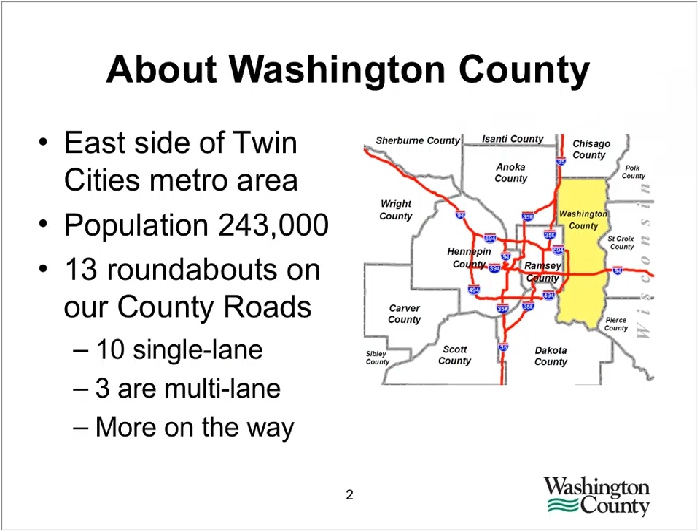Hopefully I can advance the slide here. I'm not sure how many attendees we have from outside Minnesota, but in case we do, just a little bit about Washington County. We're located on the east side of the Twin Cities metro area. Our population is about 250,000, and we currently have 13 roundabouts on our county roads, or at intersections with our county roads. 10 of them are single lane, 3 are multi-lane, and as is usually the case, we do have more on the way. We have 2 planned for this upcoming year.

So what I will cover today is a little bit of history of roundabouts within Washington County, and in particular the multi-lane roundabout, and what did not go so well with those. I'll talk about some treatments that we have implemented as far as signing, striping, delineation, and also a roundabout diet lane reduction. And I will end with future areas of interest and for research. In the midst of this presentation, I will turn over to Professor Hourdos, who can talk a little bit about some of these research initiatives.

So a little bit of history, timeline of roundabouts within Washington County. In 2007, the county opened its first roundabout on our county road system. That roundabout was our full 2x2 multi-lane roundabout. We followed that in 2008, opening 3 single-lane roundabouts, all within the same corridor. In 2010, there were 2 MnDOT roundabouts that opened up to traffic within the county that were at intersections with our county roads. For anyone outside the state of Minnesota, when you see the acronym CSAH, that's County State Aid Highway, essentially a county road that receives state gas tax money. In 2013, we opened 6 more roundabouts along our county roads, 3 of which were owned by the Minnesota Department of Transportation, 3 of which were owned by the county, but all involved county road intersections.

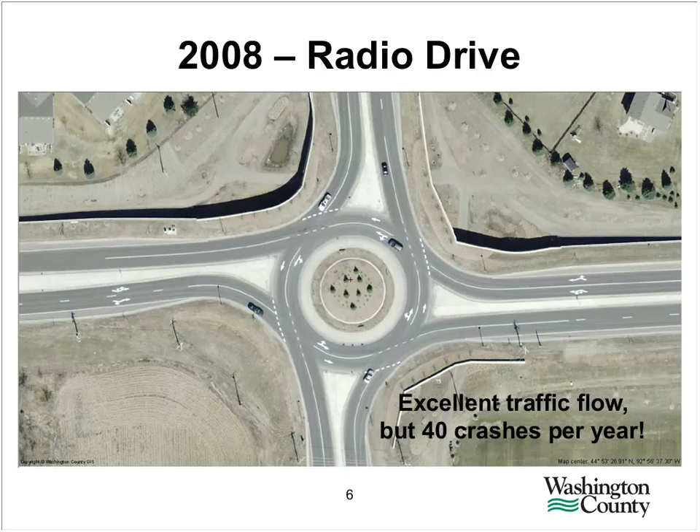And it did solve the traffic flow problems. Definitely the queuing went away, the delays went away, but it was averaging 40 crashes per year, which was very alarming. By and large, they were certainly all very minor crashes, low speed, low impact, but certainly from a public relations perspective, as far as wanting to implement more roundabouts to help promote traffic safety, this was really a problem and something that we had to address.

As time went on, we realized that really this was not our boogeyman. We had a much larger issue to contend with as far as driver perception. But this was certainly something that jumped out in conversations early on.

So what it quickly distilled down to was there's really two basic flavors of intersections that feature circular center islands. The first one, which we had constructed on our county road, is a modern roundabout. For the purpose of this presentation, I will say that a modern roundabout is an intersection at which left turns are made by the far side of a central island. As opposed to a standard intersection that does not have that central island, where those left turns would pass on the near side of each other rather than on the far side.

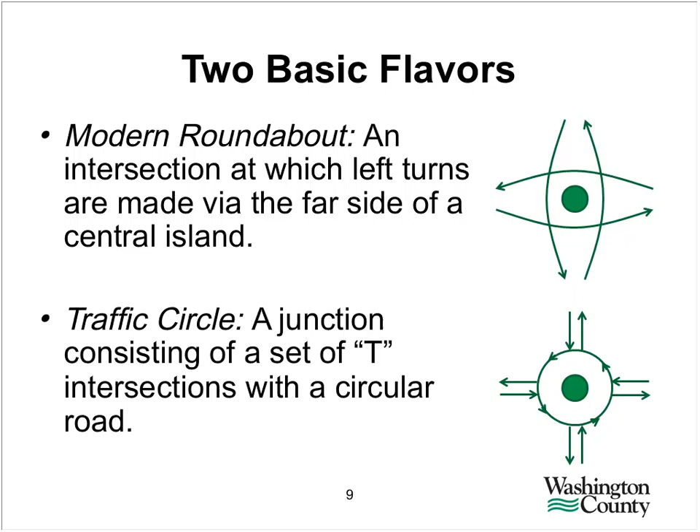I'll highlight some of the differences here and why that's important. It's important because, especially when you start to get multiple lanes involved, the legal operations and the proper driver behavior that we expect are very different at these two. At single lane configurations, that can kind of be safely ignored, but in multi-lane conditions, this is certainly a problem.

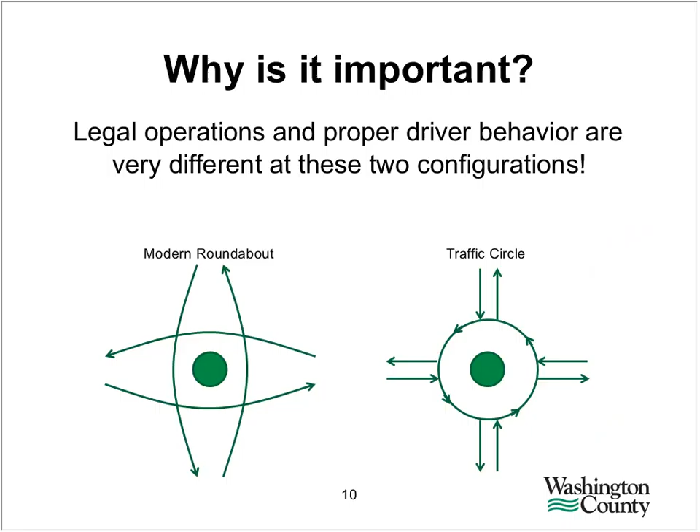To give an example of that, our most common crash type: you can see our modern roundabout on the left and that circle road up at the shopping center on the right. Both have 2 lanes of approach, both have yield control, and even though one's much larger, conceptually they look pretty similar to drivers. You can see in the picture on the right at the traffic circle, the driver entering via the right-hand lane really has no problem entering alongside cross traffic that's on the inner lane of that traffic circle. But when you look at the picture on the left, you can see if that driver does the same thing at a modern roundabout, there will be a collision. That's definitely the most common crash type that we were seeing.

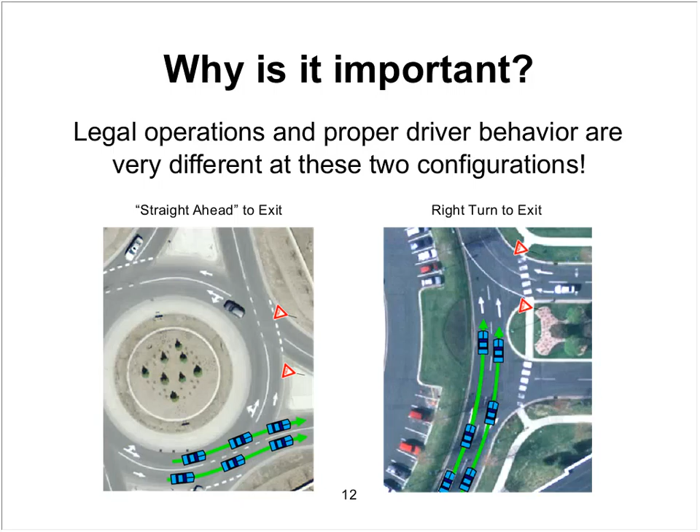A less common crash type, but still a significant one, is the fact that at a roundabout, the lanes lead out of the intersection. Whereas at a traffic circle, since it's a series of T intersections, drivers need to make a right turn to exit. In these two pictures, I'm not showing the crash type, but you can see on the right, it's just fine and dandy for somebody to continue to circulate around the intersection in that outside lane. If somebody had done that at the roundabout, they would have collided with the vehicle immediately to their left. Likewise, at the traffic circle on the right-hand side, that inside lane has difficulty exiting - they essentially get trapped by the traffic that's in that outer lane. That's something that would never happen at a roundabout.

To take circular type intersections out of the equation, we at first thought the shopping center traffic circle was our boogeyman, but really it was much larger than that. It really came down to what drivers encounter at any multi-lane intersection.

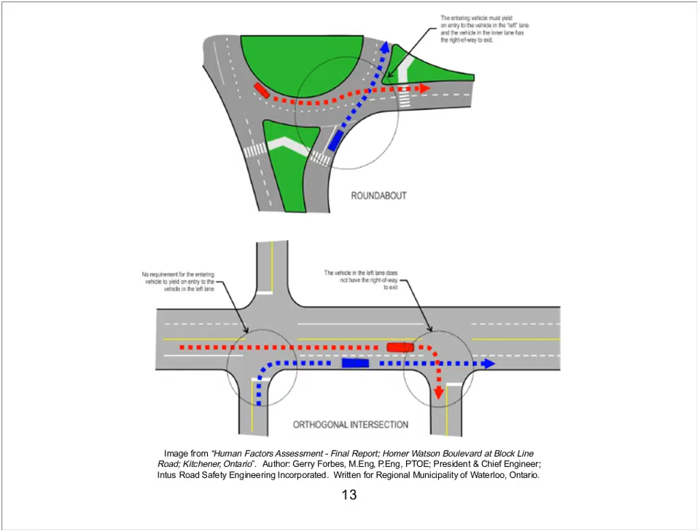But the problem is drivers are trying to apply that same logic to a roundabout. At the bottom, the driver in blue is making a right turn. At the top, the driver is making a crossing movement. What the problem boiled down to was drivers were perceiving that roundabout entry as a right turn when actually it was a crossing movement. That's when we realized that was the root of our issue. How do we communicate that effectively to drivers?

So what does this all boil down to? A modern roundabout is not a series of T intersections. There is no circle road or circulatory lane at a modern roundabout because the lanes lead out of the intersection.

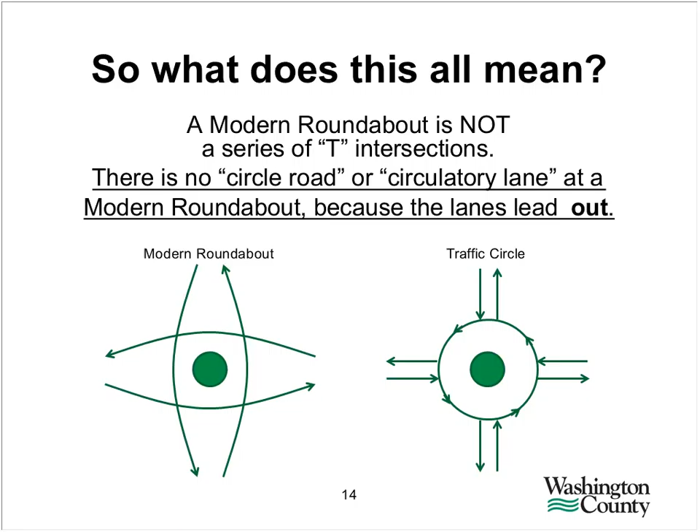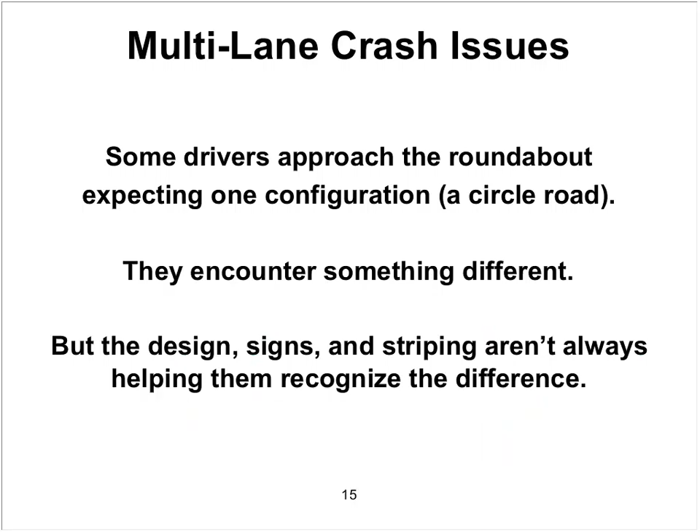The crash issues we were seeing were because drivers would come up to the roundabout expecting a certain type of configuration, that being a circle road. What they were encountering was something different, but the design of the roundabout, the signing and the striping weren't enough to help them recognize the difference between those two configurations. That was the root cause of all the crash issues we were seeing. It became very apparent by reviewing all the crash information and the statements by drivers in those crash reports.

Our less common crash type, but still significant, is what we termed the fail to exit crash. This is when a driver attempts to circulate in that outer lane, but what they're really doing is making a left turn from a right-hand lane where that is not allowed. If this were a series of T intersections, that would be absolutely acceptable, and that's certainly the case at the shopping center, but it was never the case at the roundabout, and we certainly saw some crashes resulting from that.

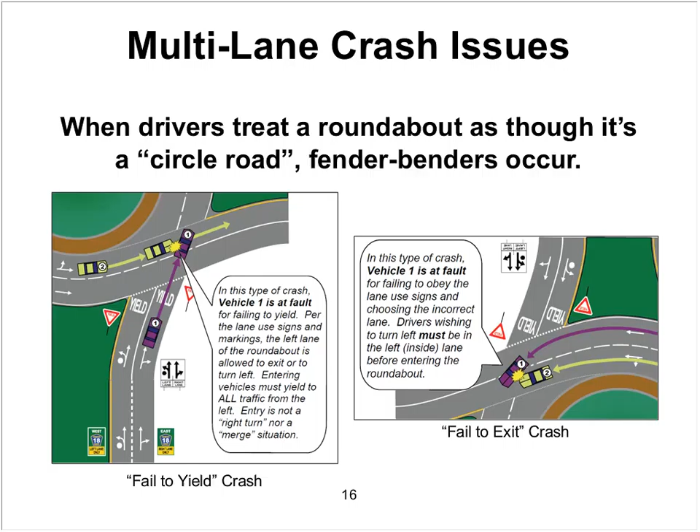The crash issues we were seeing were pretty significant in number. We were tracking them quarterly, and it varied a little bit, but generally about 9 to 12 crashes per quarter.

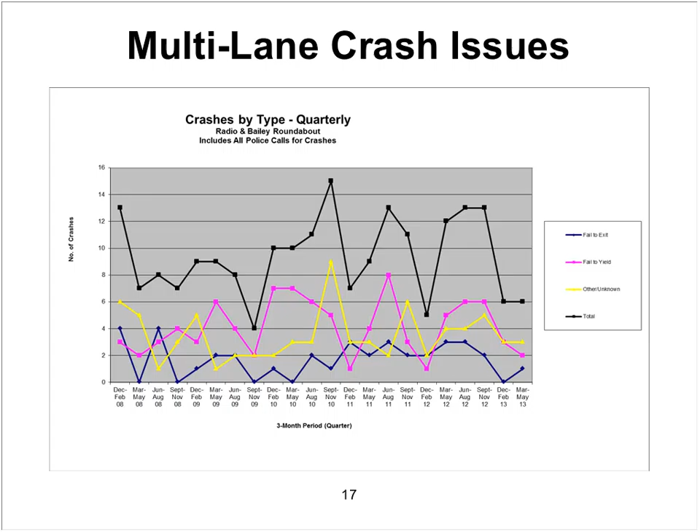So we certainly realized we had a problem here. There was a roundabout that opened in Richfield experiencing very similar issues, with an identical geometric configuration to ours. This was a research project we took great interest in, and it certainly posed some challenges as far as data collection. With that, I will turn it over to Professor Hourdos, who can talk about those data collection efforts.

As Joe said, another roundabout in the metro area of the Twin Cities was the one on Portland and 66th Street in Richfield, Minnesota, a suburb attached to Minneapolis. Joe did a very good job describing the crashes, and these types of crashes were observed in the Richfield roundabout.

After 2008, it was converted from a signalized intersection that was the third worst in Hennepin County in terms of crash severity and cost. In the first 3 years of operation of the 2x2 roundabout, there were 90 reported crashes, all minor, property damage only, but still a big concern. The traffic demand does not allow any lane reductions, so other solutions had to be investigated since the combined AADT was 30,000 vehicles.

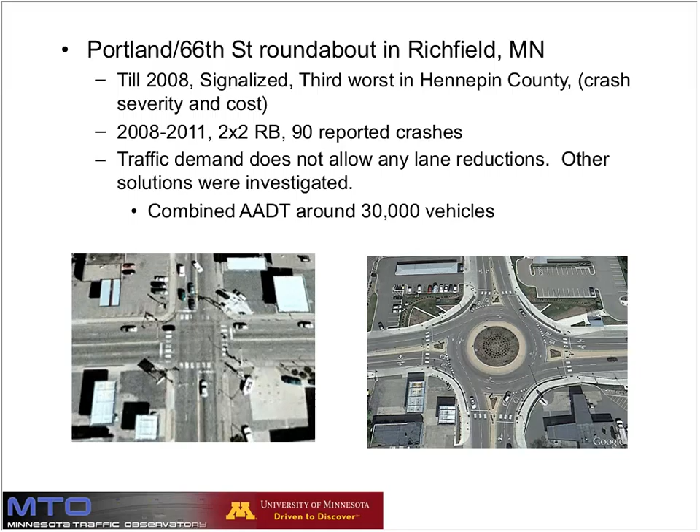If you look at some of the videos we collected during our research, you'll see the exact types of crashes Joe showed. On the right-hand side, you'll see a vehicle from the outside lane trying to make a left turn, colliding with a van exiting the roundabout. In another video, you'll see a failure to yield, where the vehicle thought the vehicle inside would keep going around, but instead it wanted to exit.

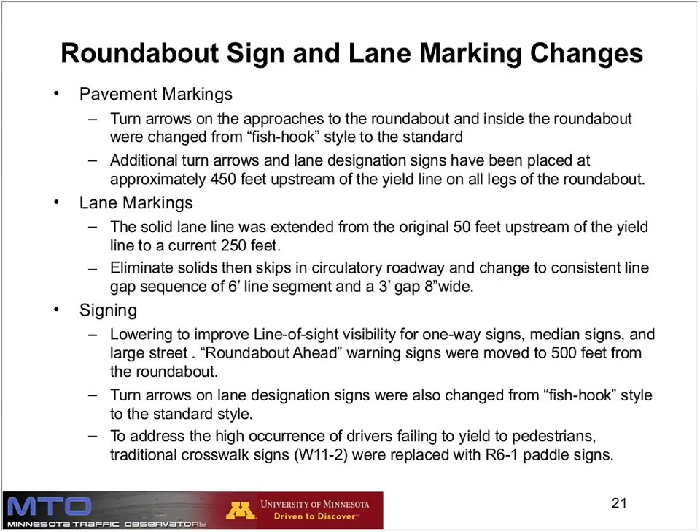The next slide shows a rather long list of things we decided to change in the roundabout in an attempt to fix the problem. I'll go to the next slide instead of reading all this, which is more revealing of the things that changed.

In terms of pavement markings, the turn arrows on the approaches and inside the roundabout were changed from the fish hook style to the standard style, because some people believe drivers are unfamiliar with the fish hook sign. It gives a sense of circulating, so regular straight arrow signs would be better.

Additional turn arrows and lane designation signs were placed approximately 450 feet upstream of the approach. The solid lane line, which originally extended about 50 feet upstream of the yield line, was extended in the new design to 250 feet upstream, to reinforce the message that drivers need to select the appropriate lane before reaching the roundabout entrance.

In terms of lane markings, we also eliminated the solid-then-skip pattern in the circulatory roadway and changed it to a consistent line-gap sequence of 6-foot line segments with a 3-foot gap.

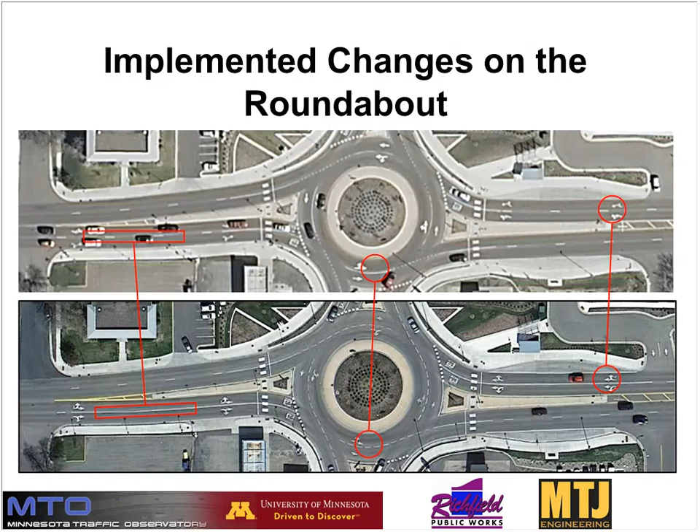In terms of signing, the yield signs at the entrance and the pedestrian crossing signs were all lowered so the line of sight is not obstructed as vehicles wait at the yield line. Additionally, since a previous study showed a very low yield rate to pedestrians on this roundabout, the crosswalk signs were replaced with R6-1 paddle signs on the islands before the crossings.

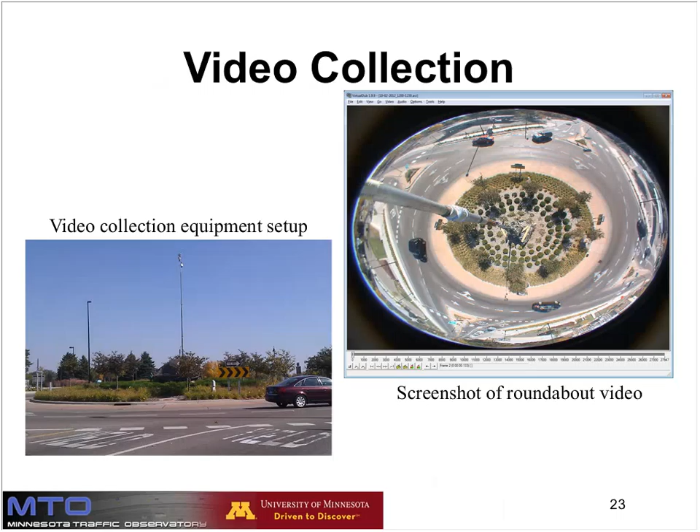The types of data we extracted manually for this project included, for every vehicle using the roundabout: the time of entry, the vehicle type, the entrance lane, and the type of violation performed. There's a list of 13 possible violations vehicles can perform in a roundabout, like the ones Joe described, in addition to changing lanes mid-roundabout and straddling lanes. We also recorded the correctness of the entrance lane choice, depending on where the vehicle finally wanted to end up.

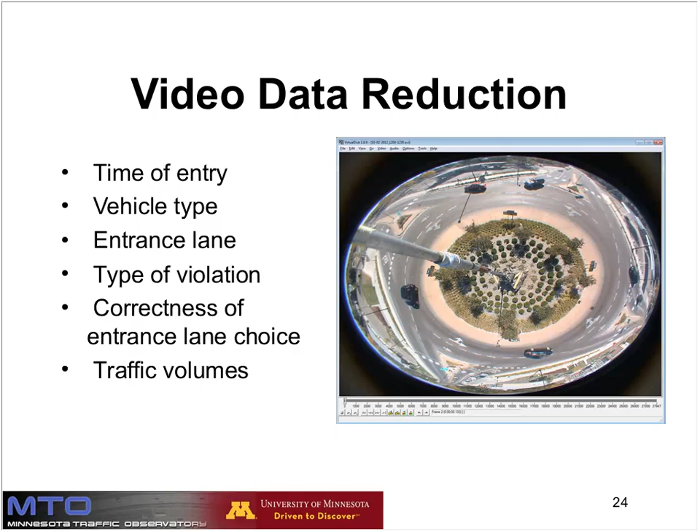Our before and after study happened in two stages. We collected video before any of the changes took place, and we collected video again approximately 3 months later. Then we repeated the data collection 1 year after that, because we wanted to see if the changes had...

Specifically in terms of the yield violations, although in the immediate before-after condition we saw a slight reduction, unfortunately this was not sustained over the year after, and in that case we actually noticed a 30% increase in yield violations.

Now, in terms of lane changes, which only generate a few crashes and very minor ones but still are violations, immediately we saw a 20% decrease in these violations, and that decrease was sustained a year after.

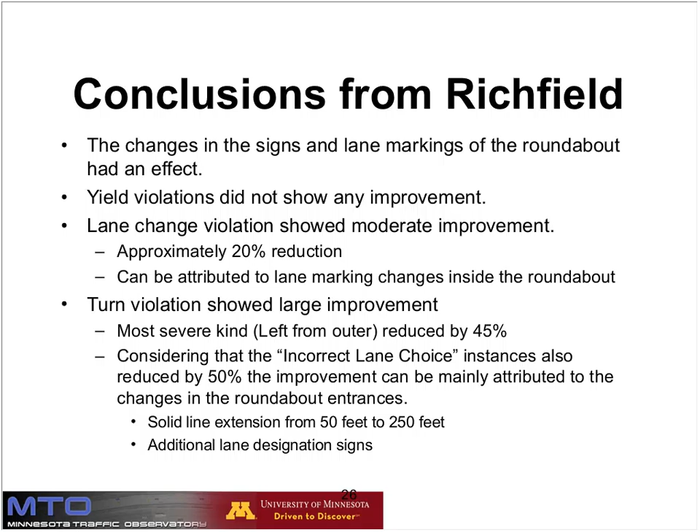So following that project, since that was only one roundabout, we had to extend our investigation to more roundabouts with different designs and different types of driving population, in order to solidify our ideas about what can be done to multi-lane roundabouts to improve safety.

For the current project, which is currently ongoing, we planned to select a minimum of 3 additional roundabouts but ended up with 4. One is on the University Drive and 5th Avenue South intersection in St. Cloud, Minnesota. Two are on Highway 22 in Mankato, crossing Adams Street and Madison Avenue. And a brand new one, which opened last summer in Lakeville at the intersection of 185th Street and Kenwood Trail.

These roundabouts vary greatly in terms of the built environment, the driving population, and especially the age of the roundabout. The goal of our project is to solidify our understanding of what solutions in terms of lane markings and signs work, so we can provide guidance for Minnesota county and municipal engineers.

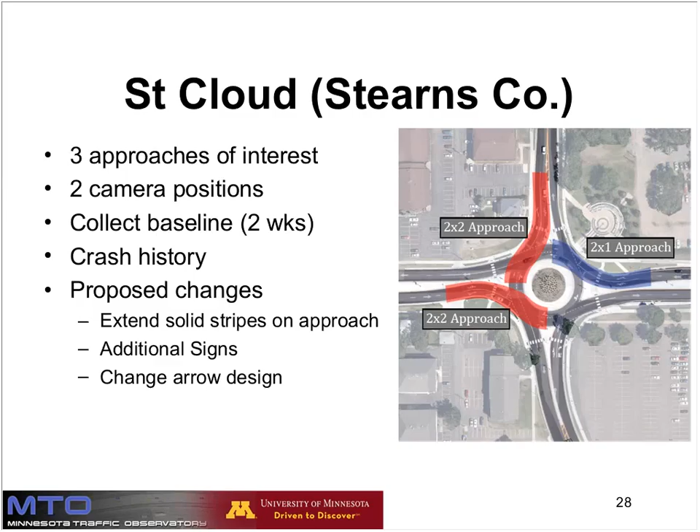Now, in the St. Cloud intersection roundabout, there are 3 approaches of interest, and only 2 are 2x2 approaches. So we deployed 2 cameras and collected for 2 weeks, in addition to looking at the crash history. Now we're proposing implementing an extension of the solid stripes on the approaches and putting additional signs. We're working with St. Cloud to see if this is going to happen as part of this project.

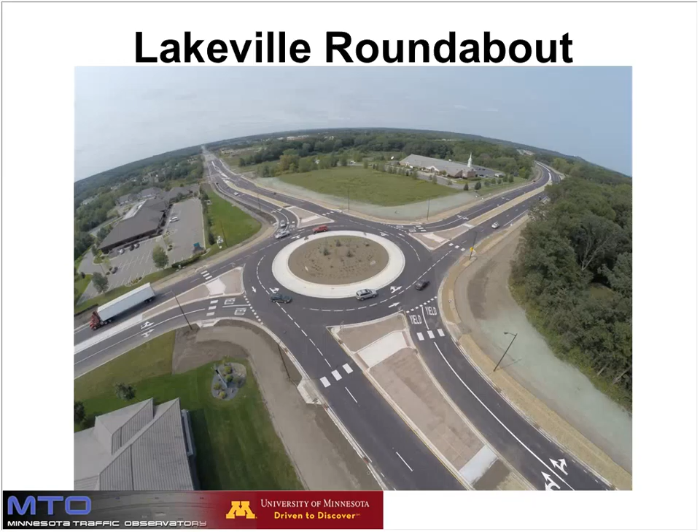Now, the latest roundabout is the one in Lakeville, and you see here a bird's eye view of it. It is brand new, and immediately after it opened there was panic because of all the crashes that were taking place. There were 7 crashes in the first week of the roundabout opening.

So one difference is that this roundabout in Lakeville implemented some of the guidance we provided from Richfield. They used straight arrows instead of fishhook arrows, as you can see here. They also extended the solid line to 100 feet from the yield line instead of 250 feet. In addition, unlike the roundabouts in Washington County and Richfield, this one also has overhead lane designation signs.

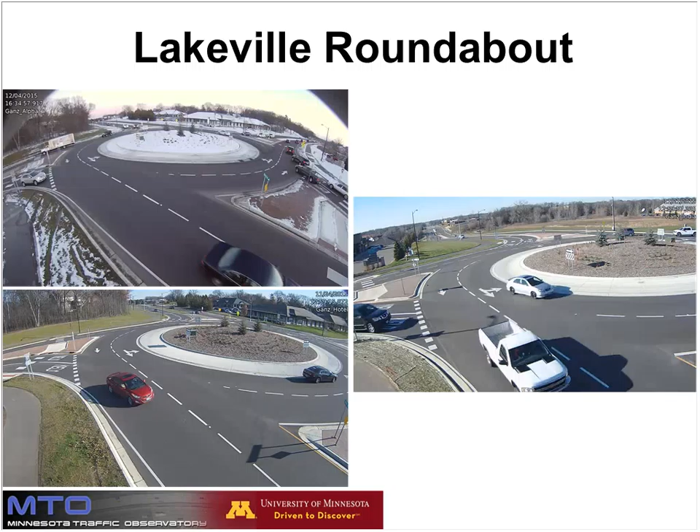These are some screenshots of the video views we collected. Because we couldn't collect data the circular way again, and because we're developing an automated method of extracting violations, we're collecting video from multiple regular cameras around the roundabout.

The two roundabouts in Mankato are both on Highway 22. The first is the intersection with Adams Street as you go from north to south, and the bigger one is the intersection with Madison Avenue. The Madison Avenue one is a complete 2x2 with channelized right turns, which is a new element compared to the previous ones. The Adams roundabout has two 2x2 approaches and a sort of turbo roundabout additional lane opening on the south side.

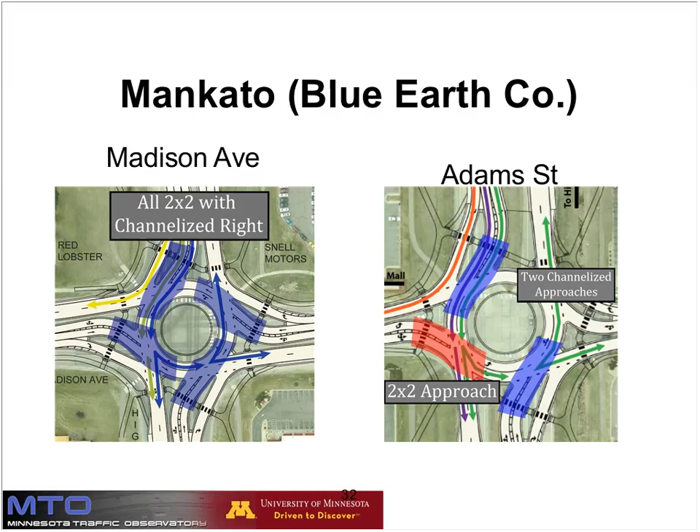The Mankato roundabouts also implemented very clear overhead signs, and if you proceed further down, there are more signs actually mentioning the street names where each lane will take you.

We had very good collaboration with District 7 of MnDOT, who were very engaged with the project and provided us with amazing help. They brought power to the poles and had their own crews helping us put up our cameras. We managed to collect data from the first day the roundabout was opened and for several months after. Changes in the signs and lane markings took place a year after opening because of observed mainly yield-related crashes, and we collected data after these changes, which mostly involved the size and location of the yield signs.

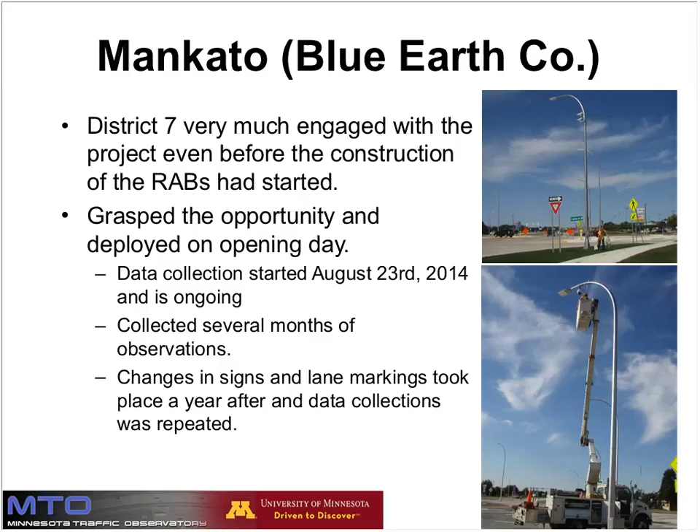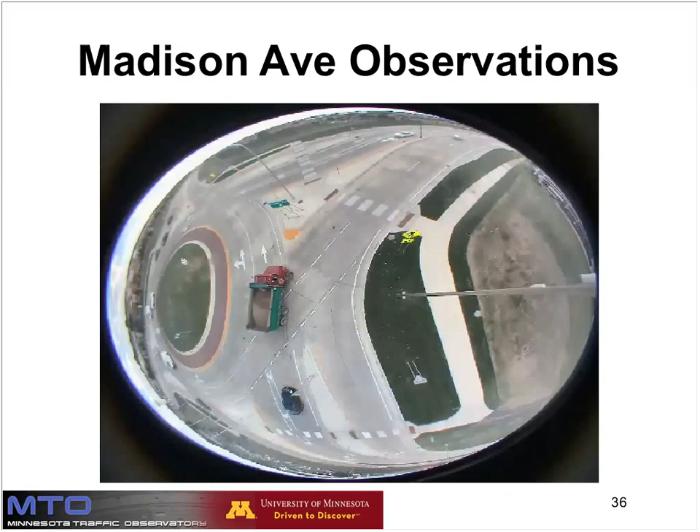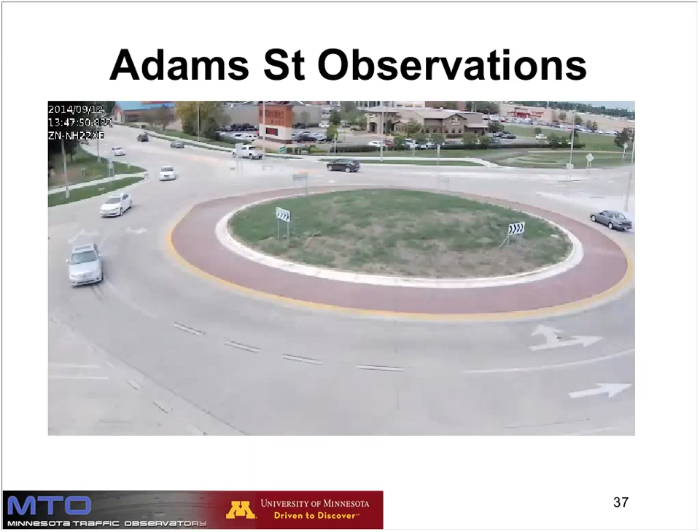These are observations from the Adams roundabout, and basically two things are happening there. One is yield violations, mainly in the north-south direction, like this one where a very big semi-trailer—I cannot imagine what this trailer was thinking trying to find room to squeeze itself into the roundabout. It's very peculiar, but this is a typical type of crash happening at those two roundabouts.

If you go to the next slide, one additional conflict that has generated a few crashes but is definitely a problem is that this roundabout has a semi-turbo design where an additional lane opens on the south only for left movement. A lot of vehicles, mainly coming from Highway 22 southbound, confuse this lane and go straight, conflicting with vehicles exiting on Adams. The exit on Adams is a single lane, so two vehicles cannot fit side by side, creating a potential problem for side swipes. You can see these vehicles performing the violation.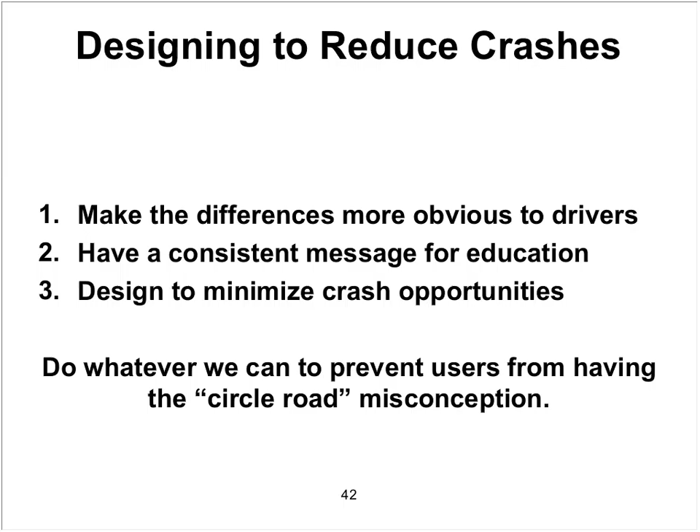So we want to do everything we can from both the signing and striping, the education, and the geometric design to do whatever we can to prevent that circle road misconception, that right turn misconception.

And so as far as making the differences more obvious to drivers, we've deployed a number of tools at some of the roundabouts that we've been building.

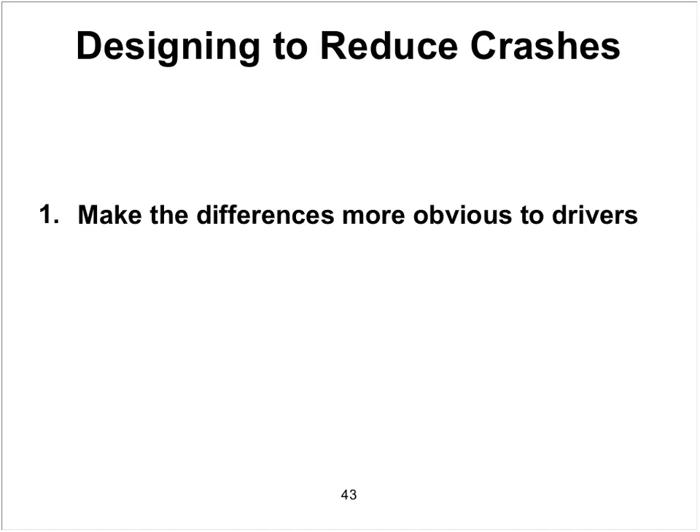In large part from the outcome from Richfield, and certainly from our own experience as well, we did eliminate usage of the fishhook signs at all of our roundabouts on county roads within the county. We did originally have some of these out at Radio and Bailey, and the reason these fell out of favor is because the shape of that arrow does imply, or certainly leaves room for confusion, to suggest that entering the roundabout is a right turn.

Followed by some circulation, followed by another right turn to exit, which is really not what it ever was. You can see in the picture here that our exits are designed very much as a straight through movement. So we eliminated the fishhook signs, both on the signs and the pavement markings, and switched to the standard arrow. This was in large part informed by the research in Richfield.

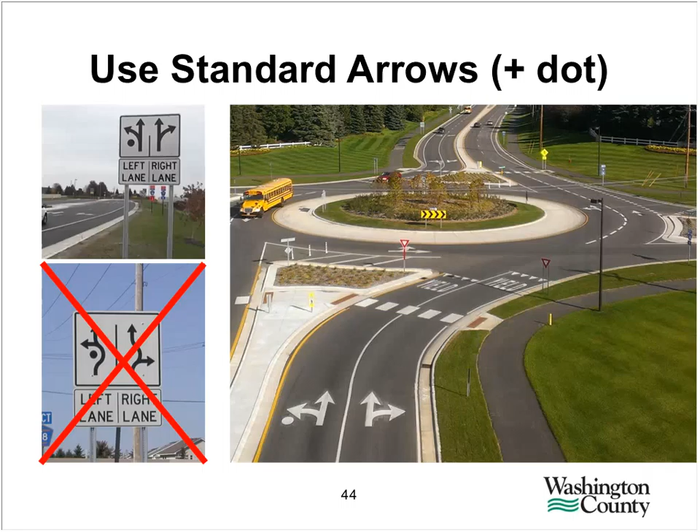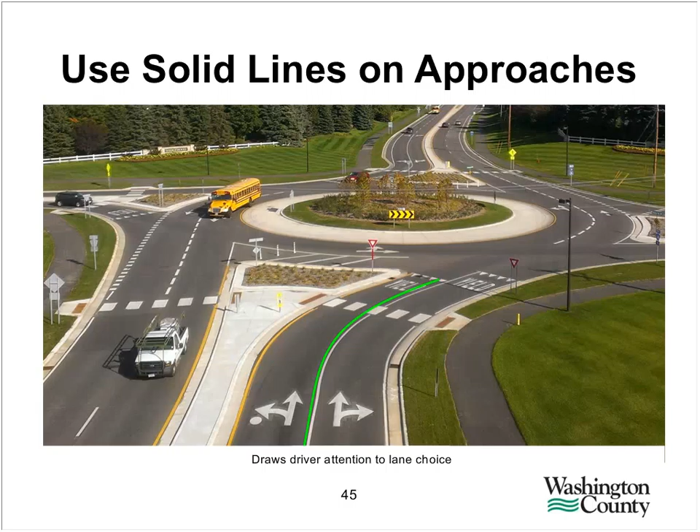Also informed by the research in Richfield, we've adopted solid lines on approaches. Usually, in most cases, we'd only use solid lines for an exclusive turn. Both of these are option lanes in that they both allow both turns and through movements, but there is some definite lane choice required. You can see highlighted by the green line here, which is photoshopped in there, extending that solid line back from the entry point.

We also used the strong skip marking. This was based on a suggestion that was published in NCHRP report 672. What we used to have was a solid line followed by kind of a light skip line, followed by another solid line, and then back to the broken line as you exit. And we've certainly been fond of using, since that time, what we call the strong skip, which is indicated here by the blue bubble.

Really what we're trying to do is for the drivers that are using this, in the position of the school bus or next to where the school bus is, really create that visual cue that exiting is a straight through movement and that circulating is the left turn movement.

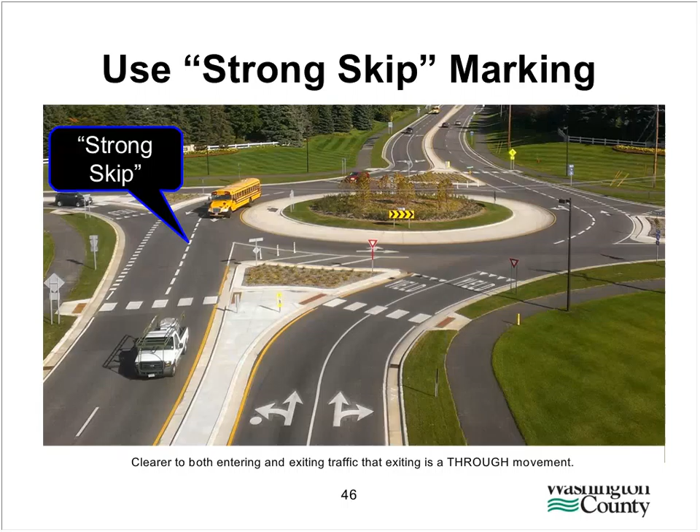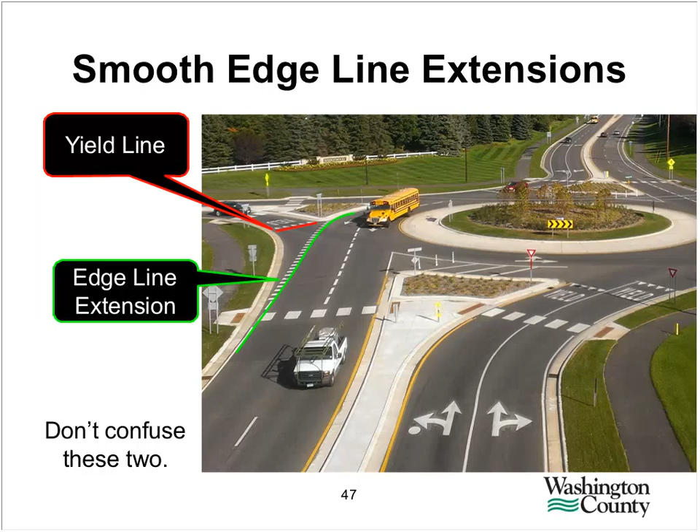Again, to reinforce that, we've put a lot of effort into targeting these properly with each project: a smooth edge line extension, keeping it parallel to that strong skip mark, just one lane width off of there. At a lot of roundabouts, this line will be shunted or set further back, intended to do double duty as both an edge line extension and a yield line. This edge line extension is meant to keep drivers from striking the curb as they exit. It is not intended to be a yield line for approaching traffic. It's certainly important that they see it, but it's really not the same thing, so it's important not to confuse these two.

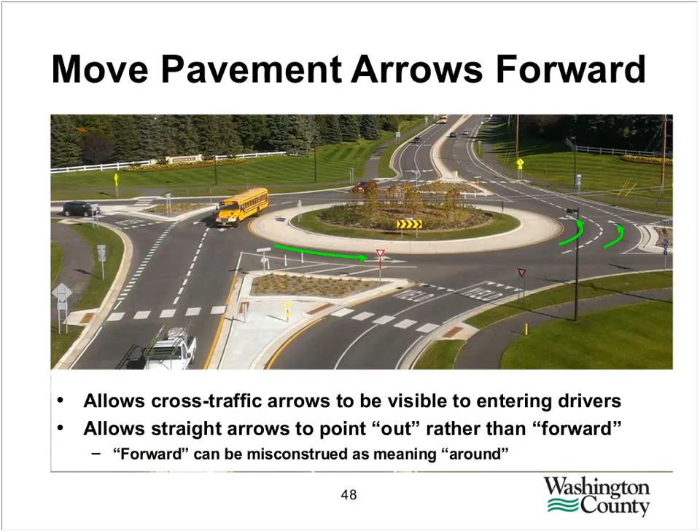We also moved our pavement arrows forward. We used to put these directly across from the entrance point, and feedback suggested it wasn't enforcing the idea that exiting is a through movement. It allowed people to misconstrue forward as meaning around. Painting that through arrow further back in the right-hand lane wasn't pointing out of the intersection at all, so we moved these forward. This also helped make it more visible to drivers entering who would see that arrow from the side.

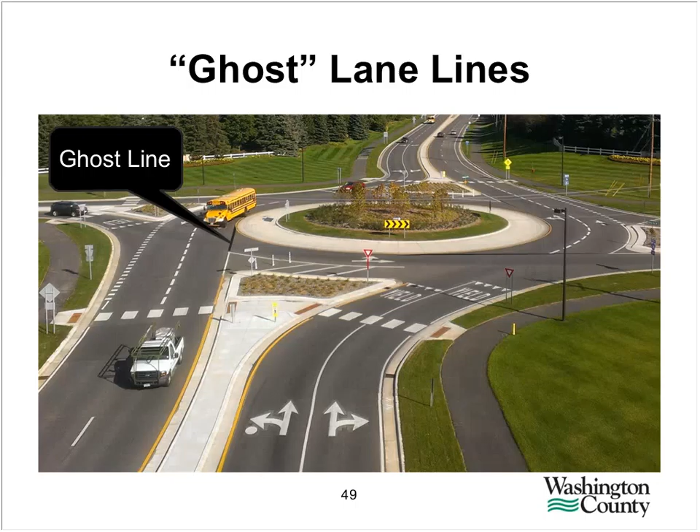We've also implemented what we call the ghost lane line. On almost all of our projects involving new pavement, we've been grinding in our markings, which has safety benefits and also maintenance benefits as far as protecting the stripe from the plow. Since we have these crews out there grinding anyway, we've had them grind in essentially a false pavement joint on our bituminous roundabouts. In the next slide, I'll show you at a single lane roundabout what that looks like. You can see they ran that grinding machine right across the left side edge of that through vehicle path. I want to stress this is not a pavement marking or a traffic control device, but it is a strong visual cue.

Now what you'll also see in this same picture is that when the contractor paved this, they paved it in a concentric manner. Unfortunately, that's also a strong visual cue, but very much the opposite type from what we'd like to convey. You can see our edge line extension is perfectly aligned with the solid 4-inch stripes on either side. This turned out well as far as striping, but unfortunately that pavement joint is going to continue to show up and give the wrong impression to drivers.

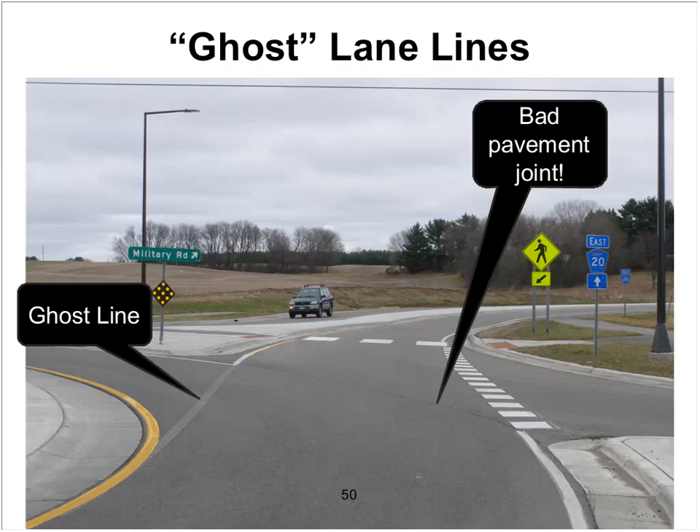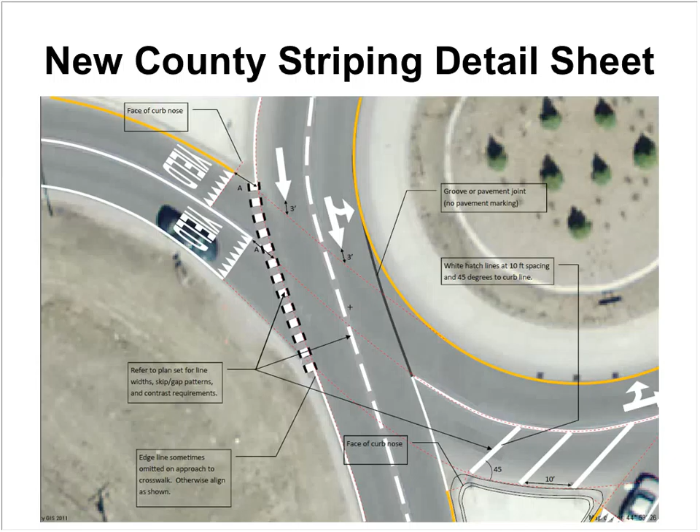We did compile all of these best practices into a county striping detail sheet. This is much more detailed than what you'll see in the MUTCD or in any standard plates. It really gets down to the nitty-gritty of where these things line up with respect to the curb faces, the travel paths, and so forth. This particular drawing is for what we'd call a 1x2 roundabout, where we have 2 through lanes crossing 1 through lane from the 90-degree approach.

Jumping back to that original list, we want a consistent message to users, particularly through our education and media outreach. We want to be careful never to describe entries and exits as right turns. I'll admit I was guilty of doing that as recently as about 10 years ago—there are newspaper articles to prove it—but fortunately I've learned that's bad advice to give. We stopped using the fishhook arrows for the same reason; they imply right turns. We also would never tell a driver to use a right turn signal to exit a roundabout. Again, that's a through movement, and we don't want to create the impression that it's a right turn.

We also want to ensure, as I mentioned, that pavement joints reinforce the stripes, so if something is paved concentrically, whether it's a concrete or bituminous roundabout, having that joint cut across the exit conveys the wrong message to drivers, especially in the rain when pavement markings aren't as visible. We want to avoid any references to the circle or circulating traffic—each of these is misleading when it comes to modern roundabouts. And of course, we want to minimize crash opportunities. Wherever we can, we don't want to provide the potential for this type of crash to happen, because if that potential is there, a certain number of drivers will avail themselves of that opportunity.

So we've been doing what we can to avoid these 2x2 configurations. We had originally designed for a 20-year volume, which really isn't a bad thing in non-roundabout context, but it creates some of those opportunities for mistakes. So it's better to design it for future expansion, make it easy on yourself to expand it in the future, but don't build it all now if you don't need to.

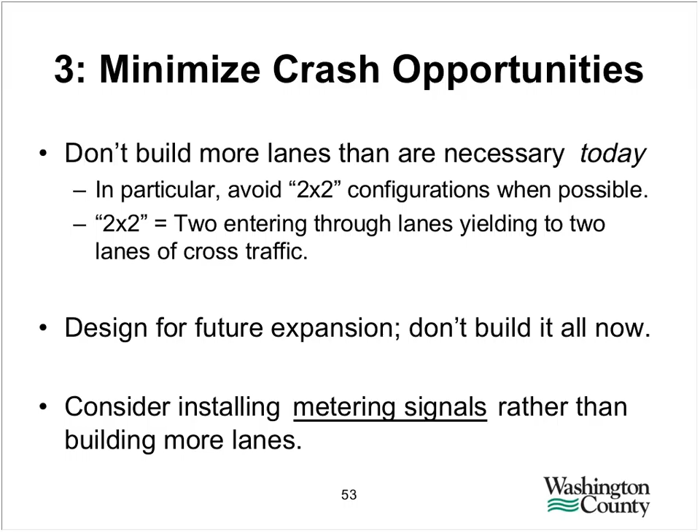As far as reducing those opportunities, we implemented what we called the roundabout diet. This is the before condition at Radio and Bailey in Woodbury. You can see there were 2 through lanes in both directions. What you can't see in this picture is at the top and at the bottom, this picture is looking west. The road dropped back down to a 2-lane rural design. So as you came into the roundabout, it would become a 4-lane road, and then it would drop right back down to a 2-lane road as you exited. This was really making a lot of those crashes possible for capacity that really wasn't needed under today's volumes.

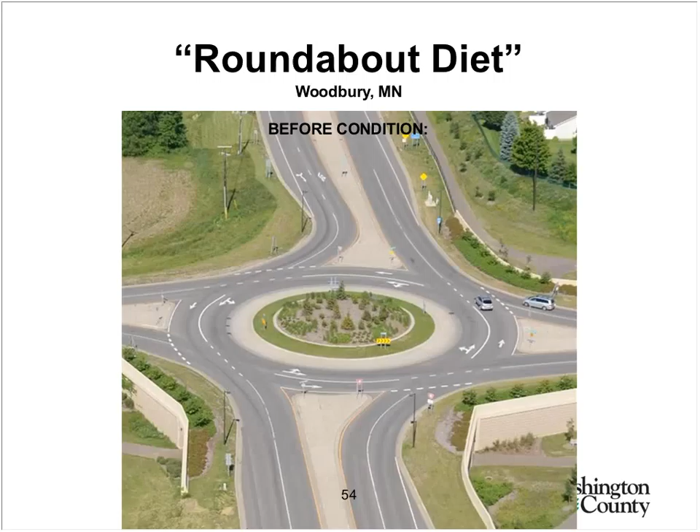This is a Photoshop mock-up that we created for media usage and for sharing with elected officials, showing what we intended to do. So you can see between the original version, the before condition here, and the after version, what we did is we eliminated the second lane for the eastbound and westbound movements. And in doing that, we really prevented a lot of the types of crashes that were happening.

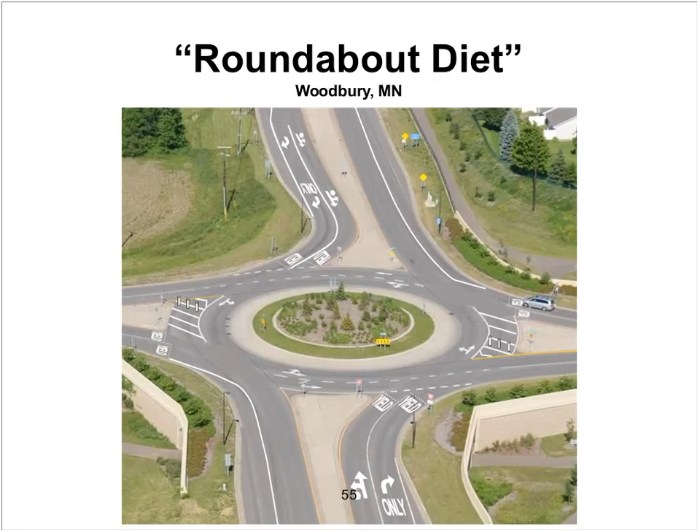First of all, the failure to yield crashes, we improved yielding compliance on the approaches by dispelling this false notion of an inner ring and an outer ring. There never was an inner ring and an outer ring, but we know that certain drivers perceived it that way. So doing this helped eliminate that attempt to merge alongside traffic. We certainly never wanted anyone to merge. It was always a yield condition, but we wanted to do what we could to prevent that.

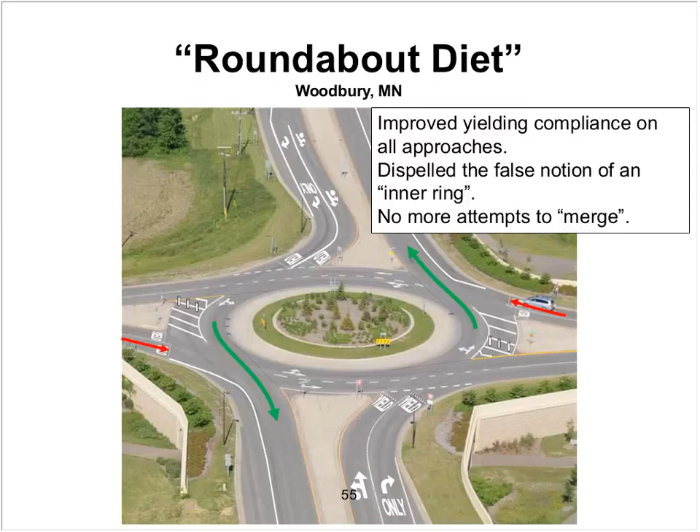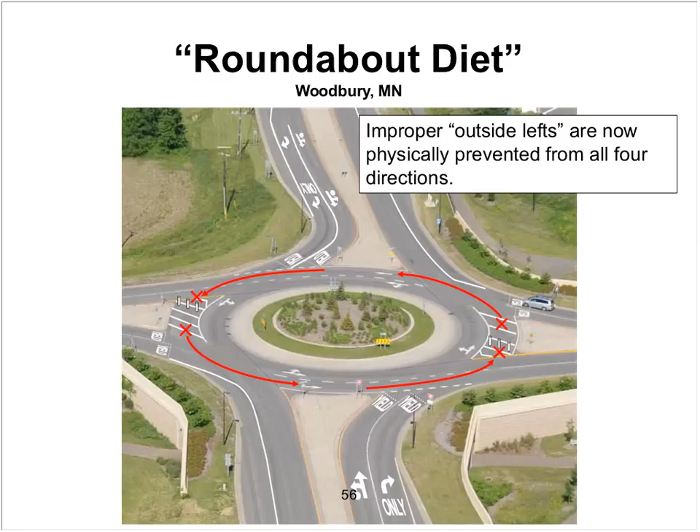Likewise, we also prevented the improper turn crashes. Even though we only did this on 2 sides, we physically prevented that improper outside left from all 4 directions, because we either made it impossible to turn to that location or impossible to make a left turn from that location. So that worked on all sides.

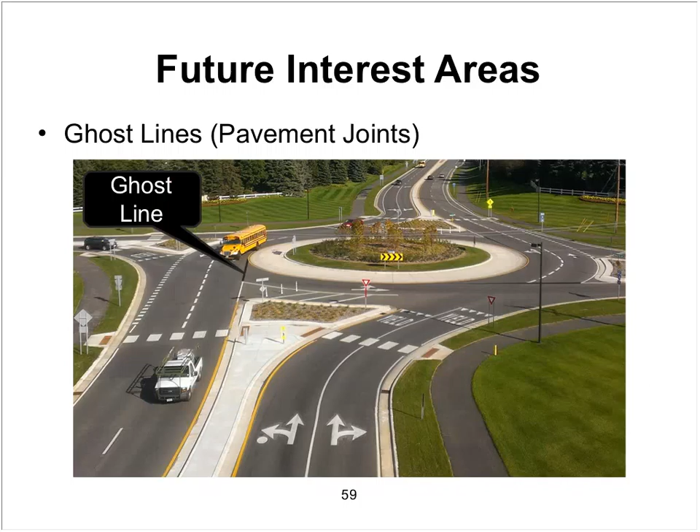We've also been focusing, especially since we've had considerable success at our multi-lane roundabouts eliminating these types of multi-lane crashes, on the distracted driver and the unfamiliar driver that just comes into the roundabout too fast. Certainly we want people to come in at a proper speed, regardless of if it's single lane or multi-lane.

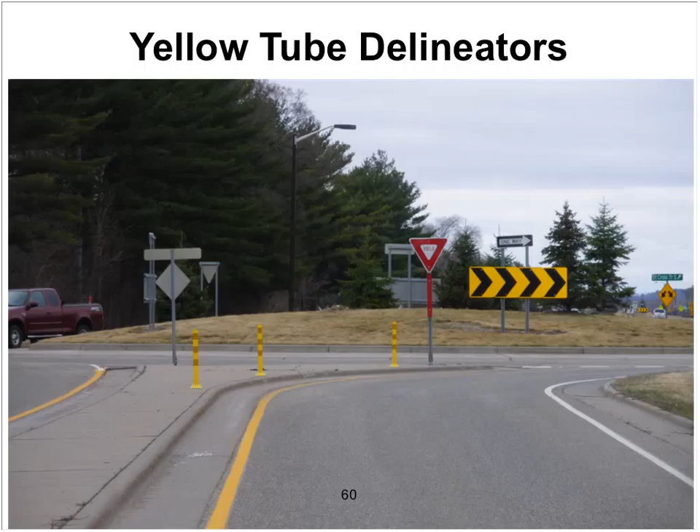Some of the things we've started doing is installing these yellow tube delineators. This was largely an outgrowth of having to replace this left side yield sign that would get struck fairly often by vehicles, and really helps, especially at night, make it jump out that drivers need to go to the right-hand side of that sign, not the left-hand side, and helps them realize that sooner.

These are certainly things we'd like to see tested for future research, to see if it has an effect on speed in particular.